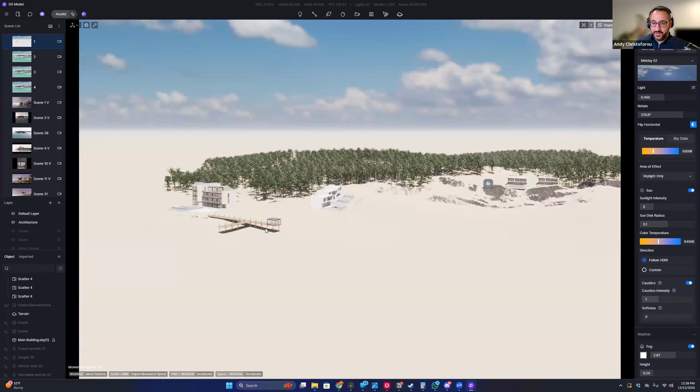This is basically everything I was showing you before, all the pretty stuff. At its core, any architectural scene comes down to your imports. I've got SketchUp and Rhino files that live in here, and you can transfer data directly through a direct import or through a live sync plugin.

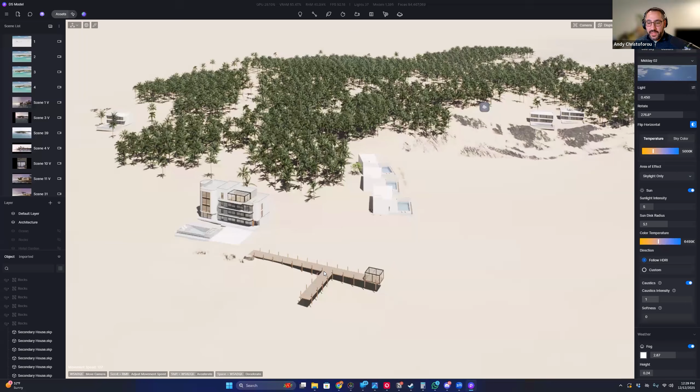The cool thing is, think of this as a warehouse—you're not locked to one file. That's one of the issues with Enscape; you basically need to bring everything into one mega file for it to have all that data. These are all different models, coming from different places. You can see this is one SketchUp model, this is another, and they're all different links. So it doesn't matter what software it came from, it can all live here.

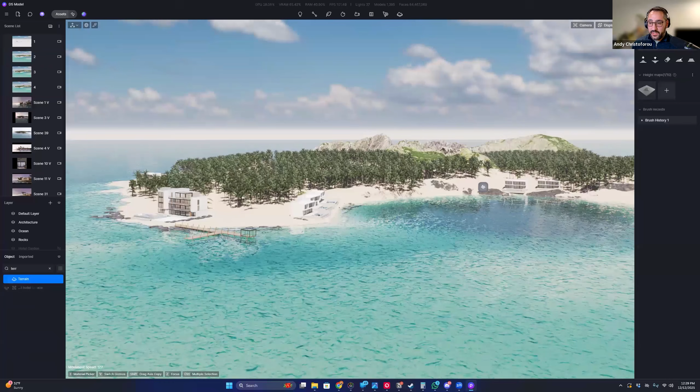So that's basically the architectural import side. Then, of course, we can start layering in more information, like environmental details—adding water and terrain. They have a full-blown terrain system, which is great for anyone working on sites that require this.

You can sculpt, you can paint, very similar to Lumion, so if you're used to that you'll feel right at home. You can even host vegetation directly on it—they're called brushes, but these are the different plants I have in here. I can easily add plants, reduce plants, brush more, brush less. All that is available here, and it's a really nice, very optimized feature.

One of the reasons I had to leave Lumion is anytime I had something that looked like this, it would flash a red poor performance symbol saying you're getting 2 frames per second because you dropped down like 20 trees. Here, because it's built on game engine tech, it's able to handle realistic lighting and vegetation in real time—the waves move, the trees sway in the wind, and you can keep painting till whenever you're satisfied.

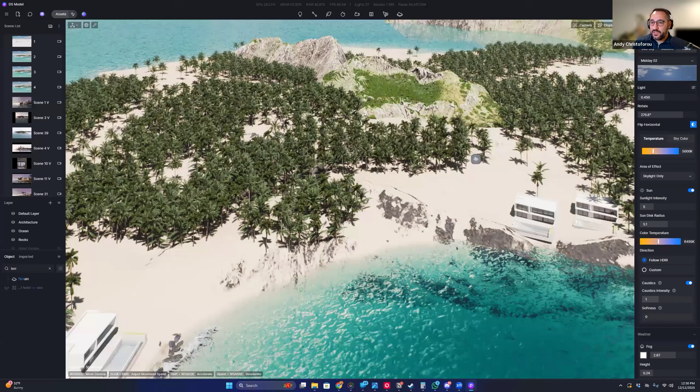And because of the terrain editor, you can bring in these awesome height maps and brushes—look at this, it's actually moving everything dynamically, all built into the terrain system. It's pretty crazy. So we've got that part. Then we've got the idea of adding more entourage.

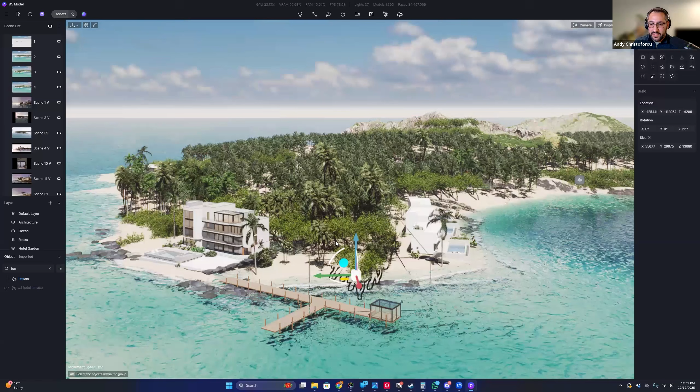This could be, people, it could be more trees and everything. You can see here that we're just placing things to fill in the scene. You can add in people, boats, and animated assets. That's something Enscape doesn't do well, where everything's static. Here, the boats will rock, the people will move and walk around a path, cars will move. There's a lot in here, which is really great.

And my favorite part, you may notice over here, is this thing called the scene list. This is basically the starting point of where AI can be really important. A scene list is not just a dummy camera position holder. You can see the boat moving here. It actually saves environment settings and visibility settings, meaning I can turn on and off layers and save them, and I can save environment settings to a scene.

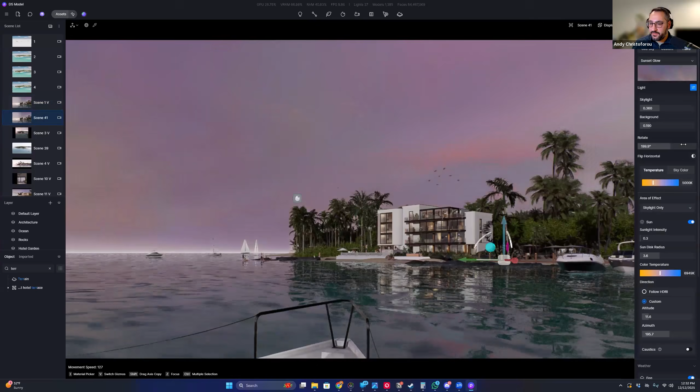So if I want, I'm just gonna make a new scene, and watch this. I can go over to environment settings and play with some settings. Let's pretend I make it really, really dark. If I save this, it'll save that and animate it. So now I can go between two different options. If I want to do a day-night test, I could do that. If I want to see what the project looks like with golden hour or nighttime, I could easily do these mock-ups and save them.

I can even put them in a group, which would let me organize my files a little bit nicer. But my favorite part, and this is where AI is really useful, and basically how I learned in architecture how people work, is they'll find a pretty picture and say, hey, can you make it look like this?

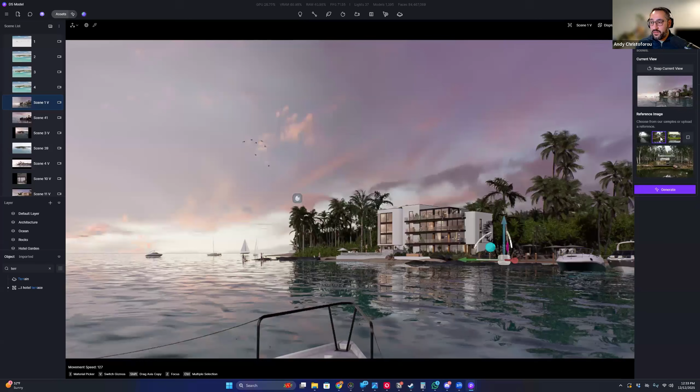So right over here, there's this thing called AI atmosphere match. This is where I hope you begin to see why I think D5 is incredible, because it understands the typical workflow. Like I was saying, people will say, make it look like this. So you can grab a reference photo from their library, or find one online. It could be literally any picture, from Pinterest or generated in Midjourney. It doesn't matter—you just grab it, put it in here, and it'll analyze that image and apply the same color correction settings as well as atmospherics. That's huge, because if you're a designer, you don't understand what all these settings do, like skylight, background, rotation, HDRI, sun intensity, and radius. Nobody really gets that.

Joshua was saying, you guys can see my screen, right? Okay, okay, all right, good. You scared me for a second—I was like, has nobody been seeing my screen? Okay, great, all right, awesome.

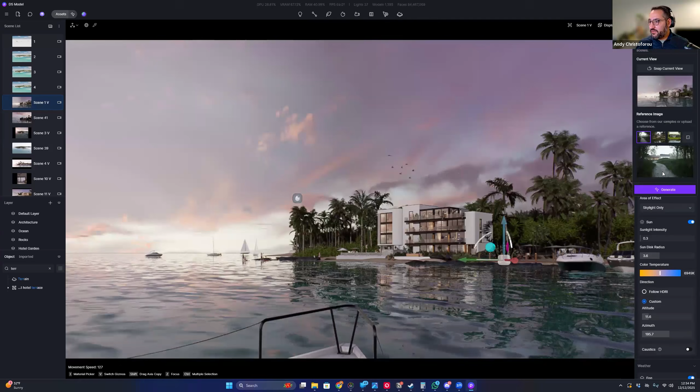So let's go back here. If I want, I can grab an image of my own, or just grab a default image. This one looks kind of cloudy, as you can see. I'm gonna hit generate, and watch what's gonna happen. It's gonna start generating a skybox from this image, as well as bring in some of the fog. See how it's working? It goes in steps, adding more and more detail until it's about right.

This is great because since we're humans and designers, it's easier for us to just find something we like and tell D5, hey, can you match this so I don't have to do it manually? There we go—it picked up some of the coloring and the fog in the background, and I can play with the strength of it if I want it to be more intense or less intense.

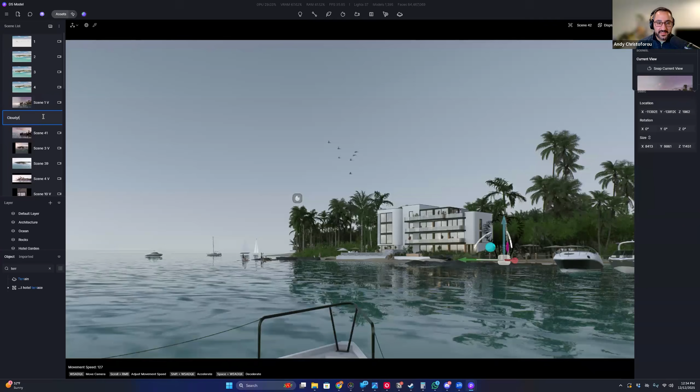So this thing is huge. AI Atmosphere is great—I usually just keep making duplicate versions of my scene and test it out. So now I can hit add scene and call this the cloudy scene. But let's say I don't want to use this function.

They actually have this great thing called D5 Studio. For anyone who works at a large firm, or anyone that's more than two people, there's this idea of a team space where you can save all your presets. So your environment settings—you could say, hey, this is the firm standard for a sunny day or a cloudy day, and save that here. You can save your models and materials to your library, which gets shared with anyone in a team space. That's really nice.

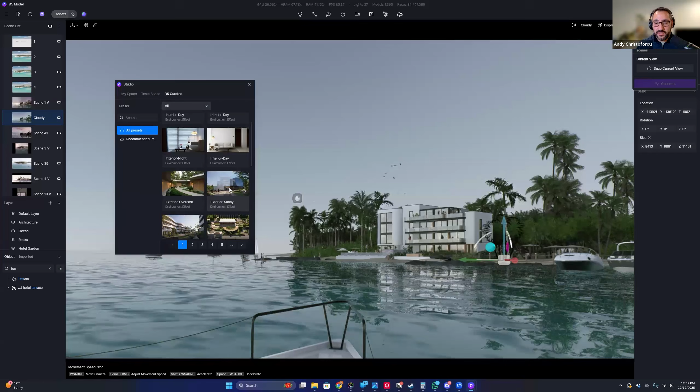So what I could do is just double click this and it will apply that to the scene. This is huge because if you don't know what you're doing, you can just go here and find something that looks really nice. If it resonates with you, you can go in and apply it.

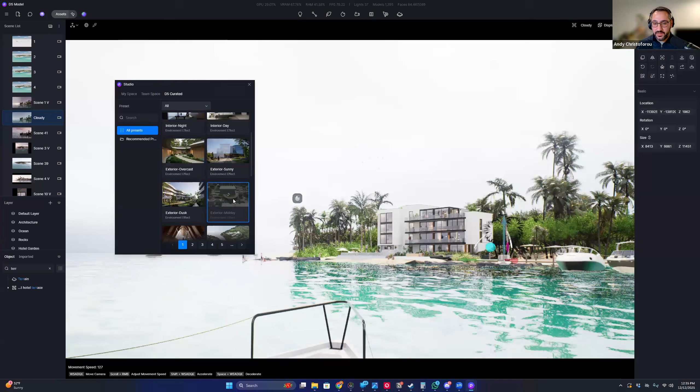So they've taken care of the traditional preset workflow as well as the AI front. There's a lot of great options in here. I always recommend just going through it—it's pages and pages of content—and see what makes the most sense. This looks great, I actually really like this one. I'm going to save this one. We'll call this midday.

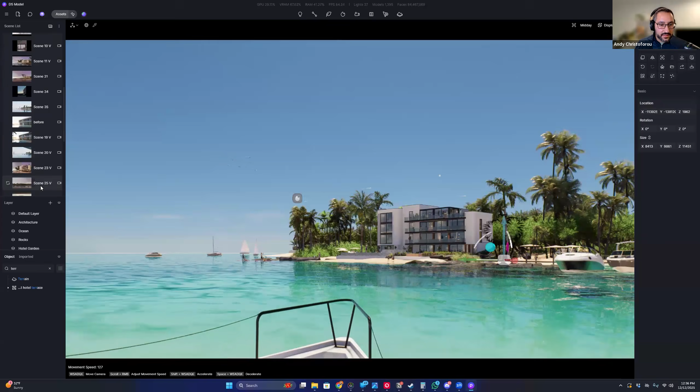So that's one side of it. Now let's talk a little bit about materials because this is another huge one. This is a massive project we've been working on. Say I go over here—all right, so I've got this really cool view, but I also have these houses that got this super plain material.

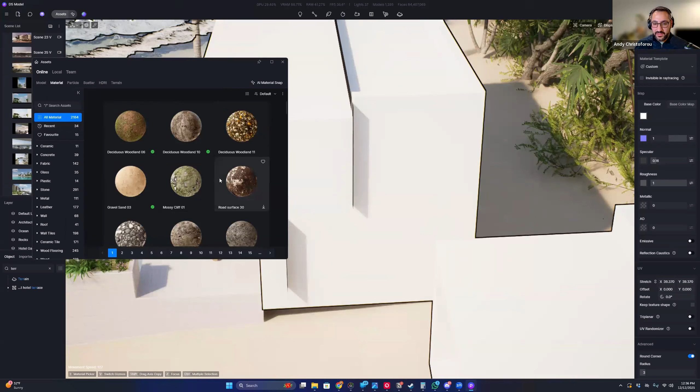So in D5, there's a couple ways you could get materials here. You could use their awesome, amazing material library where there's literally like 2,000 materials. Any type of thing you need is here. The reality is 90% of my materials come from here. It's very rare that I have to find something so unique that I can't find a good starting point in the library.

And then Ben's asking, can you discuss variation? Oh yeah, we could definitely discuss that, that's a great point. So let's say there's something I actually can't grab an image of, or a material I don't know—there's two ways of doing this.

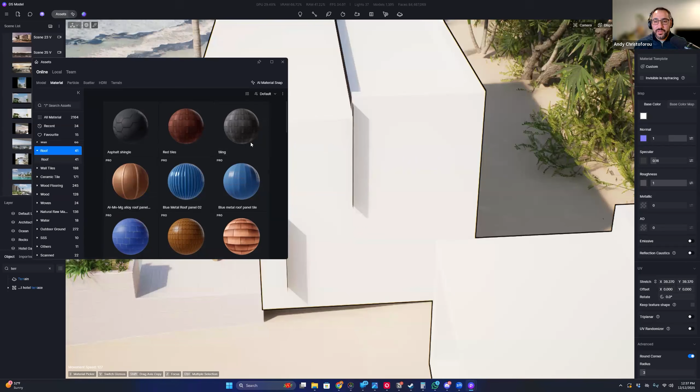You could use this thing called AI Material Snap, and this will look at a photo. You can upload a photo if you want and select the material you want. So let's say I want this wood—I can add to my selection, and then tell it to generate a material based off of that.

Again, this is how architects work—we find a picture, or the homeowner or client says 'hey, I like this style, can you just do this?' You're going to hear that a lot. This uses AI in a healthy way because doing this manually sucks. You have to find something that looks similar or do a bunch of photoshopping, and that art of photoshopping images into textures is so niche now that not a lot of people even know how to do that. So this is going to think for a little bit and apply it.

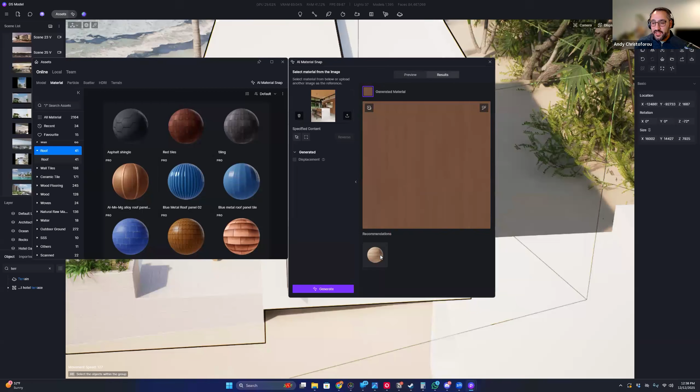While this loads—here we go. This is the AI generated version, and it also gives you a recommendation from the asset library itself, which is great. All of these are seamless materials, so I could just apply it to my project. It's as simple as that.

The cool thing about the material editor in general is—one thing I always found really annoying in something like Enscape is the way things get mapped. So if you ever have issues mapping or getting something seamless or realistic, there's a bunch of settings here. Triplanar basically takes all the faces, despite their scale or individual UV, and evens it out, giving a nice world scale.

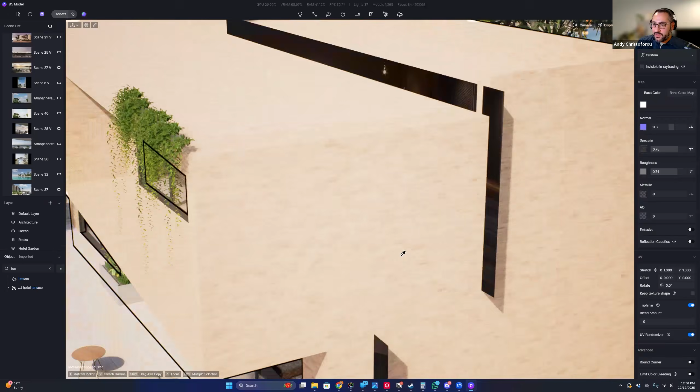Then there's this idea of a UV randomizer. This isn't great for linear elements, but if you have anything that's tiling, this will break it up and make it randomized. Then we've got this lovely round corner feature, which bevels all our edges so you don't need to model that. Again, they're doing all these things that are super useful on the workflow front.

Then they have this other tool called AI generated texture maps. So if you upload a texture of a material—let me see if I have anything, probably not off my hard drive—but you can actually upscale it and make it seamless, and then generate all these maps all with this button. So its job is literally to generate texture maps.

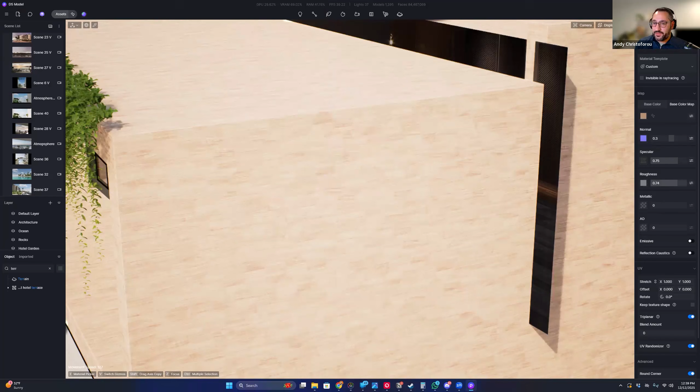Since I'm using something from their library, that's not going to work here, but the idea is you could grab something online and plug that in, and then you'd get normal and roughness maps. Again, you don't have to make these maps, because nobody likes making them unless you're an ArchViz artist. So that's huge.

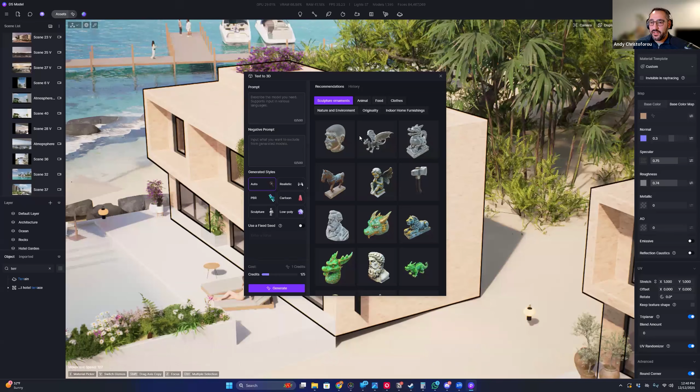So they've got this material snap, they've got AI atmosphere, and that's not even all the settings. They've got this guy right here, which is text to 3D. So if you want a chair or a piece of decor, as they're showing here, it will go from prompt to 3D. It's just crazy. Let's say I want this little dragon thing, I could go and generate that. I could generate these pieces of sculpture, some rocks. It's just amazing, and that's all from text. Very, very clever there.

Now, to answer Ben's question, because in the world of architecture we deal with a lot of options, something I know they're working on is a proper variation manager, but the best trick we found is you can actually just create a layer. So let's say I'm going to add a layer, we can call this option one. And then we can call this option two.

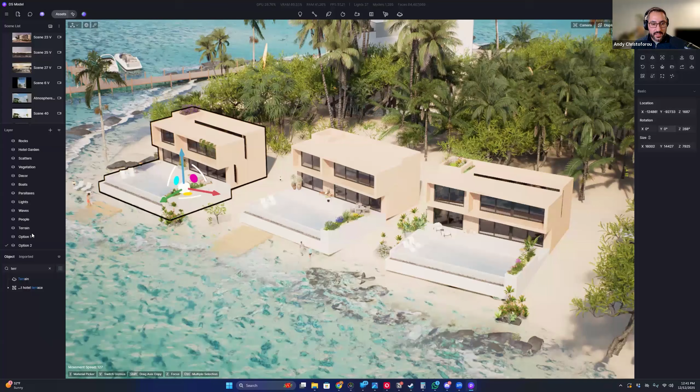And you can actually just plop things on. So let's say I've got this, let's just say it's a design layout, I'll put this on option two. And I can turn this off. And then this is like the layer for option one, or like the view.

So you can actually save this to your scenes as well. So now that I have this here, I can create a new scene and we'll call this option one. And if I sync that, then create another one called option two, and just do the vice versa, turn this off, turn that on, and then sync it, I can easily switch between the two. And you can do this for materials, for layouts like this, different geometry. Very, very simple way to do that.

We're working on a way to package that all up so it's a little bit easier, similar to the Lumion option editor. That one's really nice. So you've got that.

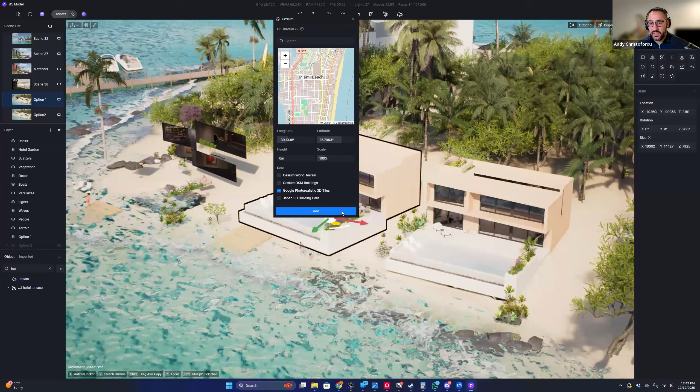Then the big difference I'd say I've seen with D5 and some of the other tools is the addition of some really nice features called Cesium. So typically, when you need context, you need to go out and find a 3D model. Well, now they basically have this plugin called Cesium that brings in Google 3D tiles. So if you see something 3D in Google Maps, you can hit add, and it will import that for you.

Check this out, I think I'll start from scratch just so you can see that. I'm going to hit add. Let's say my site's right here, and now it's going to stream in the world. So now looks like it's loading. Come on, Cesium. Oh, put this on default layer. Great, and now I've got my Google Maps.

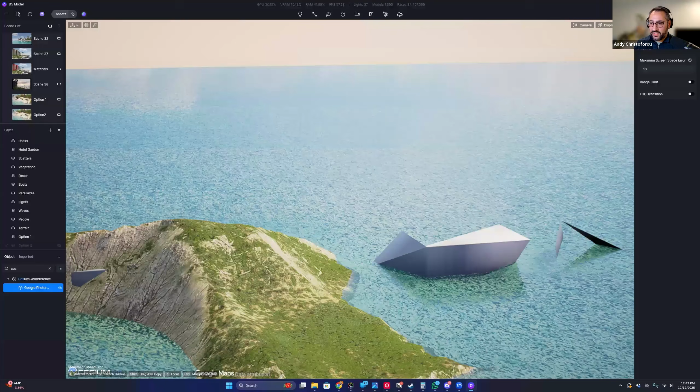And now I just got to find it, it might be under the water. Here we go, perfect, so it's literally loading in the world. Let me turn this off and raise this. This is great because as architects, you know how annoying it is to get 3D data of your context. So let me fly over here. This is streaming in the whole world, and I know it looks super...

Yeah, so Jay, the Cesium feature is actually coming to individual plans in the next big D5 release. Right now we're on 2.11. The next one, I'm not gonna spoil it, is coming. I can't give any specific dates, but it's coming and it will be for individual plans.

So right now it's streaming everything in because I was flying around, things are loading in, but you're getting the textured Google Maps cities, which is great because we're kind of all sick of the OpenStreetMap-style boxes, which you could also do here. This is going to give you the textured version. So this is huge, because now when you need aerials and backplates, you could just load this in, drop your project in, and now you have this.

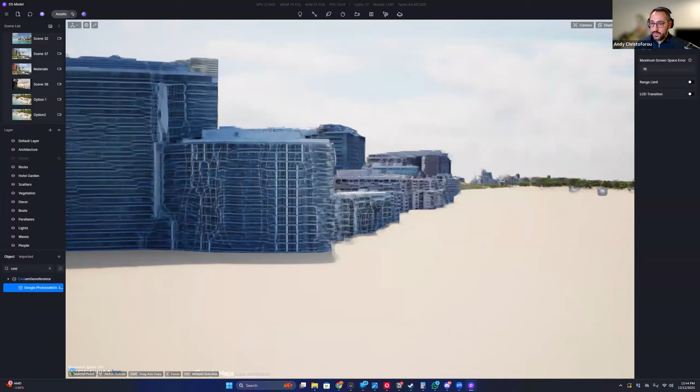So let me see if I could turn this off so you could see everything. Ocean. And now let me bring this up. I gotta find my gizmo somewhere. But look at this, it goes on and on and on. And then just for the sake of performance and everything, it's not loading everything, it's just loading the details that are in camera. So I've got all this terrain. Trying to find my gizmo.

There we go. Location, let's say. There we go. Perfect. This is what I want to show you guys.

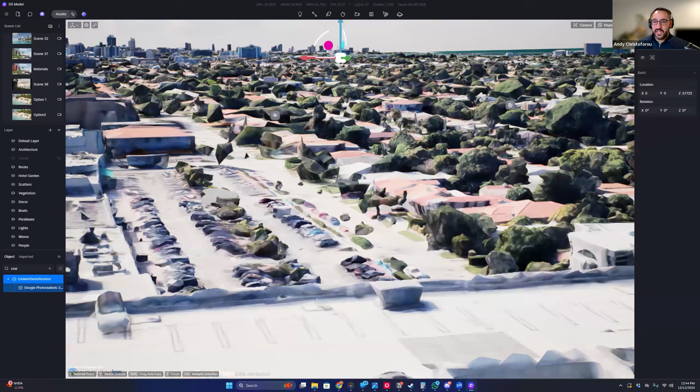So it brought in water, it brought in the mini cities, the mini houses, big houses, skyscrapers. This is basically all of Miami, right? So very, very useful because from far away, you can render this out and then use their upscaler, which is what I'm going to get to, to make it look nicer. But you can see these are all the typical things architects deal with that they've figured out. And that's what I love about all this.

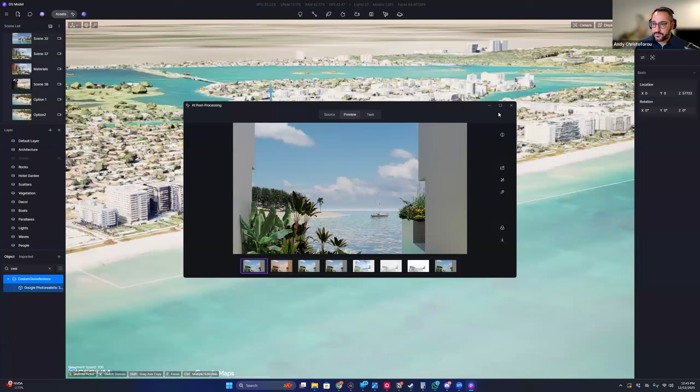So now I'm going to talk about the AI post-processor, and then we'll wrap this up. Check this out, I had this rendering, let me maximize this. This is the rendering. I picked a very low HDRI just to illustrate this point, but you can use their built-in enhancer and style transfer functionality to improve it.

In one click, I was able to go from that scene to something like this, and look, it made the clouds look beautiful and fluffy. I mean, look at the vegetation, look at the boat, right? And you can control how much it affects the image or not. Then here's another view, again look at the difference in the quality of the clouds. So clouds get enhanced, vegetation gets enhanced. Pretty much it's like a free enhancement.

In my opinion, because the argument comes up, oh, should I be using D5 versus V-Ray or Corona, it really comes down to your expertise and time. But I think if D5 can get you like 80% of the way there, and then you use these enhancers that aren't really changing much about the overall design, you're getting an extra 10, 15% boost in quality. Look at this before and after. So with a really rough image, you could do that.

And yeah, it will enhance characters. You can even specify what particular things you enhance. Check this out, in painting you've got smart retouch where it touches everything. It's got better sky, better water, vegetation, and characters. So if you render a person, you can choose to enhance it as well, and it'll basically go from the plasticky 3D look to realistic.

So that's the photorealistic side, but then there's the actual sketchy side. And I actually love these styles and everything. All you're doing is choosing from these different style settings right here, whether you want a marker drawing or pencil sketch or watercolor, or if you want winter, autumn, you name it. So then you've got pen and everything.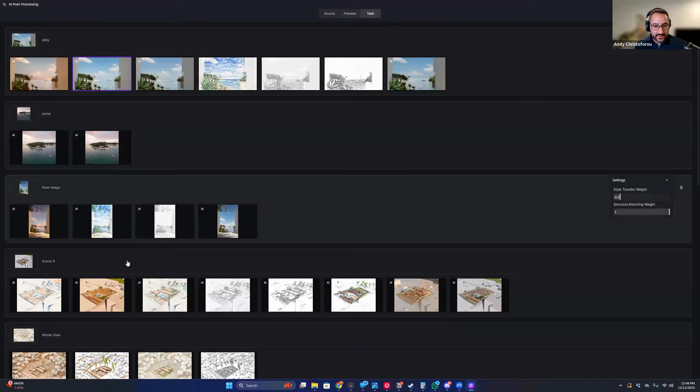I'll give you some other examples. This was... yeah, here we go. This is a good example of a kitchen, right? So I could easily switch it to stylize, and it does a good job preserving, if you look right here, the actual structure. And it's the same thing for the realistic side.

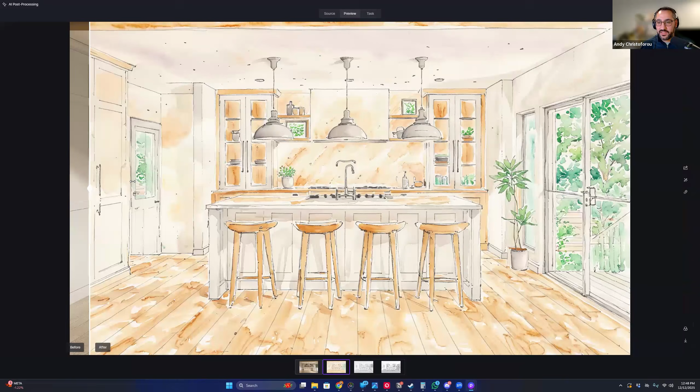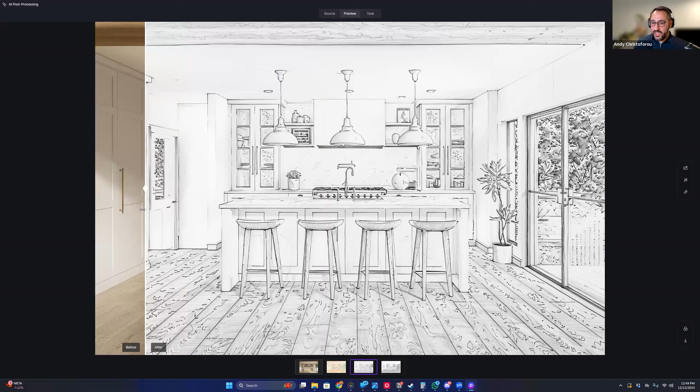But we love this kind of stuff because think about it, you're working with a client, it's like your first design meeting. You can't go into a meeting with all this figured out because design is all about iterations, right? So it's nice to have these kind of concept images early on, so you could just talk about the form. You don't even need to talk about texture, you could remove that from the equation, and you don't need to spend 10 hours drawing something like this. So there's a lot it could do.

I'm trying to find another one. Yeah, here's a good example. This is just for you, Michelle, about the structure.

If I were to show you a transfer here, you can see the building—in this case I didn't even touch it. I just said give me the pretty flowers. Then if I want to do something more intense, let me double check this one. Yeah, this is just for the sky. So like you can tell it to target elements outside of the architecture, or actually target the architecture itself.

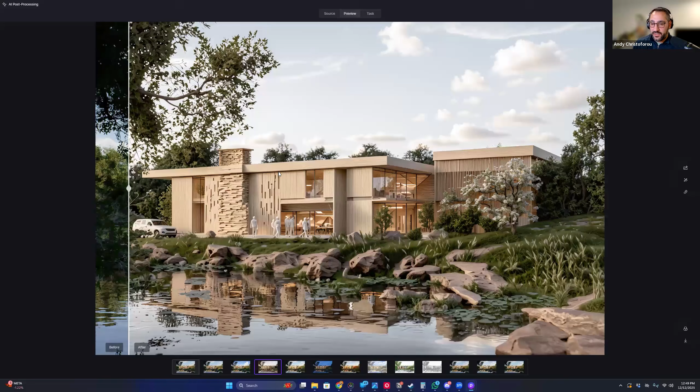This one was to convert it to a scale-looking model. This was just to improve it overall. But you can see it does a good job with the forms and everything. I had the texture weight really low because I wanted to enhance it, but you can see the people begin to look better—they don't look as plasticky.

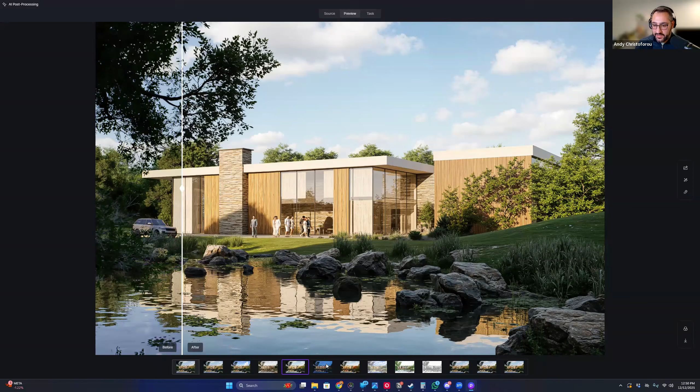You could even go to different shifts if you want to do a nighttime rendering. And then of course you've got your stylized and your enhanced images as well. So this is what I mean—the car, for example, looks much better, the people look much better. But this is all because I'm telling it what I want to focus on. So they give you the flexibility.

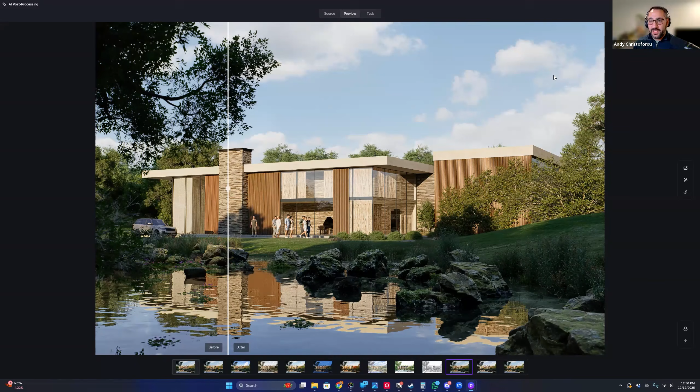And that's the really nice thing about D5 and the AI functionality—they figure out the things that matter to architects the most. And that's the choice you have to make with AI tools. They've got a bunch of other amazing functionality, and I should probably just keep doing these webinars to talk about D5 functions, but nobody else is tackling the AI stuff on the same level as this.

I didn't even talk about the AI agent—this is if you're working with landscape designers and you want to create a scatter preset, basically, hey, just fill this whole area with these trees and vegetation. You could choose a preset or just tell it what you want. Like this example before when I said I'm working in Dubai, I need drought resistant plants—it'll do that. So yeah, there's a lot here.

I could talk about—we should make these webinars 4 hours long and I could just talk about all the features. But Peter asks, do you use other platforms for rendering or exclusively now? So basically, if we're talking traditional ArchViz, 100% D5.

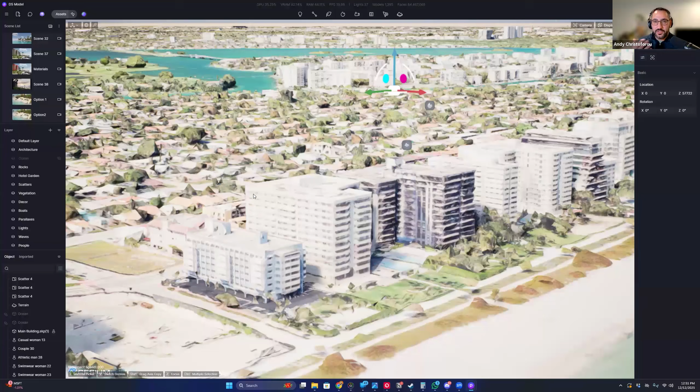Personally, I've had an interesting story. I started out in the world of ArchViz with Unreal Engine—Unreal Engine, incredible piece of software. I highly recommend it if you want to do interactive tours, because I was doing VR for a while, and that's an incredible platform. So then I realized I can't really make a business off of Unreal Engine because it's too slow to do all the stuff we need.

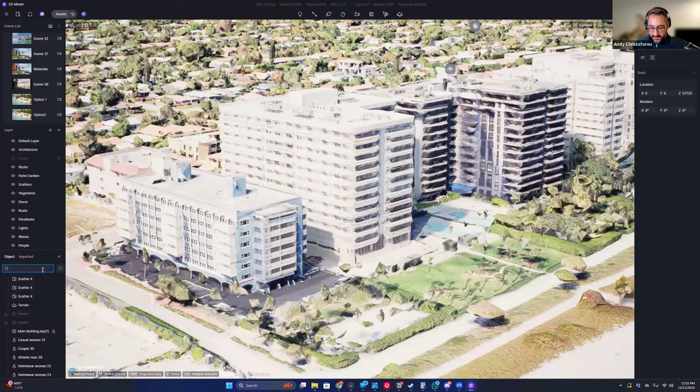And then I got into Lumion—this was around 2015, 2016, used Lumion for a bunch of years, and it was good, great speed-wise. But then I felt ever since 2019, 2020 it was falling behind. I wasn't a big fan of the updates. And then I played with Twinmotion for a little bit, which I thought was cool. And then D5 comes along and it's just like, wow, this is better than everything.

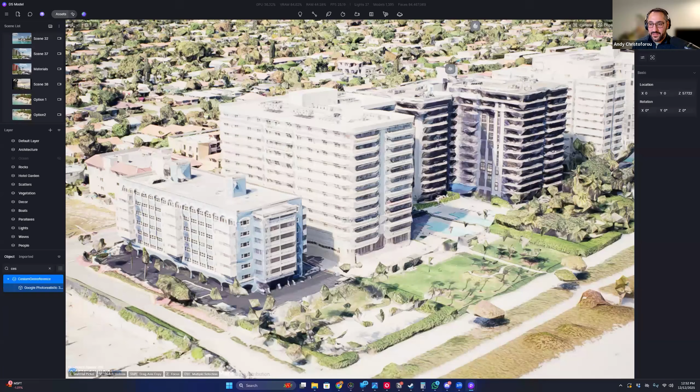And my firm KPF, we used to be 100% Enscape, and now we're transitioning out to D5 because it basically does everything that Enscape does, but at such a higher level. There's some functionality I didn't even talk about—if you're familiar with Revit and multiple people working at the same time with work sets and work sessions, you can do the same thing. You can break up your scope of the model and say one person gets this file, another person gets another file, and you can sync to central. Nobody else does that. We have a lot of people on our teams and it's great—everyone can contribute to the same model. So that's huge.

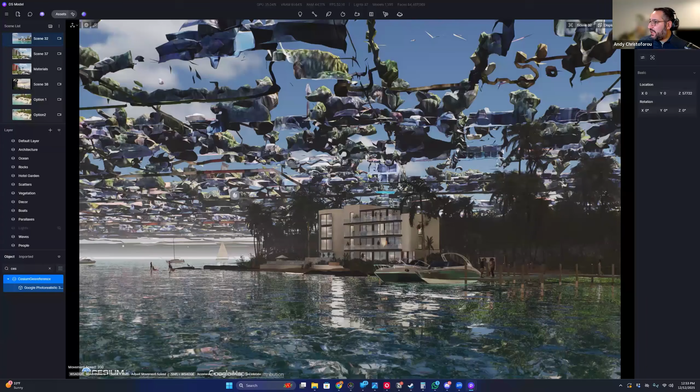And then—sorry, I'm catching up on the chat. I tried to enhance a D5 scene with AI and it took a long time. The long time, this is all server related—could have just been a busy day. I'd recommend just trying it again to see what's up there. But it's generally very, very quick.

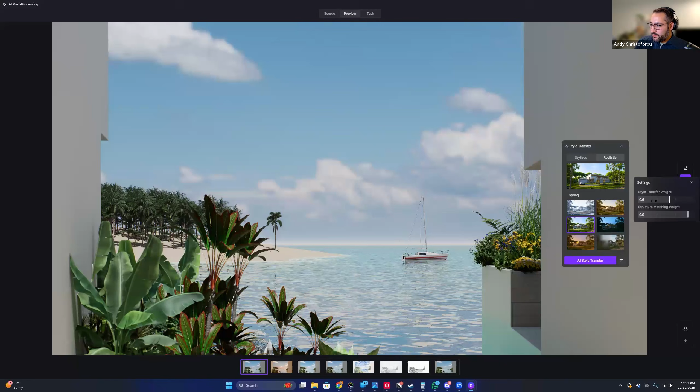Like if I were to grab any of these scenes and watch—because I'm doing this live, obviously it's not going to work. But if I grab any of these settings, just to put my money where my mouth is, let's go with spring, and I hit AI style transfer, and I do something like this.

Generally it's probably less than a minute.

So while that's waiting, did I try VR in D5? VR in D5 is actually the most insane VR experience ever. Fidelity wise, it's like ray traced in real time VR. It's insane, you need crazy hardware, but it's amazing. In terms of laptops and everything, the better, if you have the budget for a 5090 laptop, Jesus, yeah, go for it. Right now I'm using a pretty crazy graphics card, and you save so much time and money when you have the right hardware.

Wes is asking, are there any AI starting to do construction drawings? That's one of my biggest issues with AI right now, is that it's tackling all the creative things. Think about it, AI is getting rid of creative writing, illustration, photography, and it's not going for the boring stuff like CDs. I think the reason, and I think I'm allowed to say this, is that when it comes to training sets on CDs, all that stuff is really confidential and proprietary. So someone like Autodesk doesn't have billions of drawings to be trained on, if that makes sense. I think that's actually the limitation, they just don't have the data set for that.

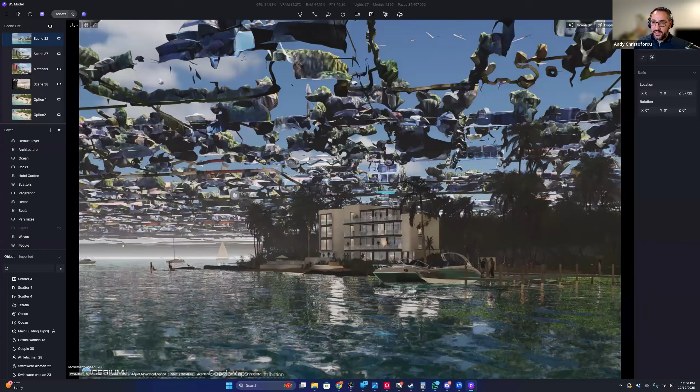Scott's question about the VR stuff, where is it? I think I actually have to enable it, but it's a button, VR beta. So when I click that, I don't have the headset on or connected, but you basically click that and go right into it. The only difference is you don't have an executable, so you can't share it or send it, you have to open up D5 and run it. That's one of the only things there.

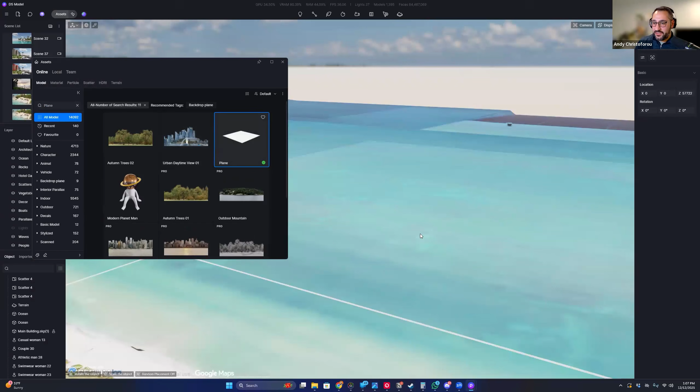I'll show you two features of the scatter. I'm gonna grab a simple plane—you can do this on terrain, but I'm just doing this plane for the sake of it sticking out easily. So if I have a plane here, let me scale this up and move this up.

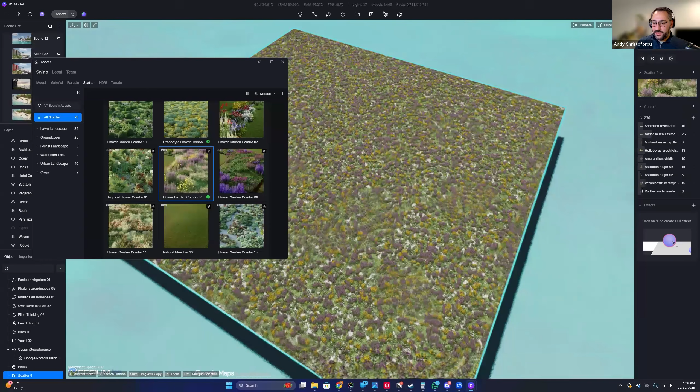So look at how dense this is. It just added, what, 6 billion faces, and I'm still getting 30 frames per second. Look, I can literally go down into here and it'll take a second to load, but it's crazy.

So this is the typical scatter. If you want to use the assets, all this is editable. Let me look for scatter over here - I think it's this guy. You see these are the parameters, like the probability of them spawning, how big they should be, and all that. So you could do that, or you can go over here to the AI agent, this guy.

Let's just say I click this. I can swap out these details, but I'm just going to use the default for the sake of time. So it's going to look at this, analyze it, and create a scatter group.

So basically what I just showed you, you can place on a plane, and then you can even export it out to Excel, which is great because we give this to our landscape designer or architect, and they could verify the species, since you used the species names, and say this looks good - let's order 500 of this, 300 of that, whatever.

That's all there. So there you go, look at this - this is the schedule. Imagine doing this manually. It fulfills the water requirement, and then it fulfills the light requirement and everything.

So once this looks good, I can hit auto scatter. It takes all those species, and then I can left click and create. So this is like 20, 30 species. It's going to put all that in a scatter group on this plane, and then I can choose to export it. It's insane.

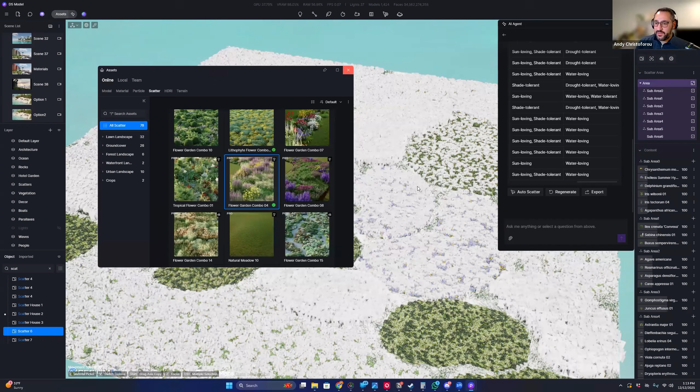When you talk about US money, or the US dollar elsewhere, it just does not translate well. Even when we talk about doing business outside of the States, it's really difficult to make sense of. But they understand the user base. The reality is the majority of ArchViz artists come from third world countries, that's just the reality of it, that's where the data is. There's no way someone's going to spend 80, 100, 200 dollars a month on a subscription.

But you can see the auto scatters coming in.

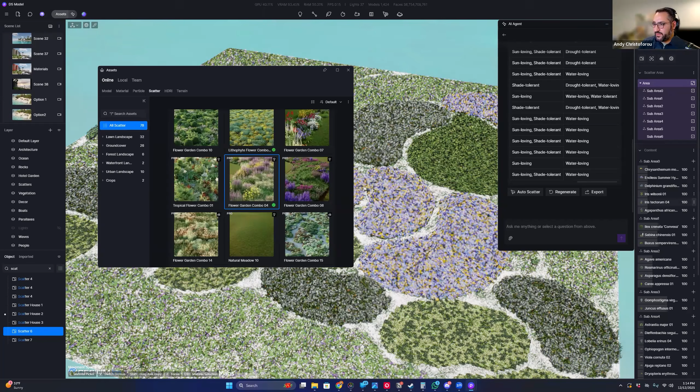Ralph, I think there's still good starting points with the parameters of what the plant is. At least if somebody can figure out the prompt for location, sun requirements and water requirements, that already puts them in a much better spot. But if landscape architects want to generate all that, that's totally fine. I'm just saying as an architect who doesn't know about all these species, this is a good middle ground so I could be at least somewhat intelligent. And if the species is wrong, I'd say hey, I like the look of this, can you recommend something? We don't want to get rid of their jobs completely, it just helps inform the design conversation.

So the wish is to get sharp, transparent backgrounds around the imagery, or insert a background photo for some jobs. That may not be possible in D5 due to needing real sharp, transparent backgrounds around the imagery.

There are things like you can import your own HDR, your own HDRIs, and you can also do your own backdrops. They do have starting assets for backdrops and everything, so you can swap this out with your own version, and then go and upscale it, and it's going to be pretty close to what you're talking about.

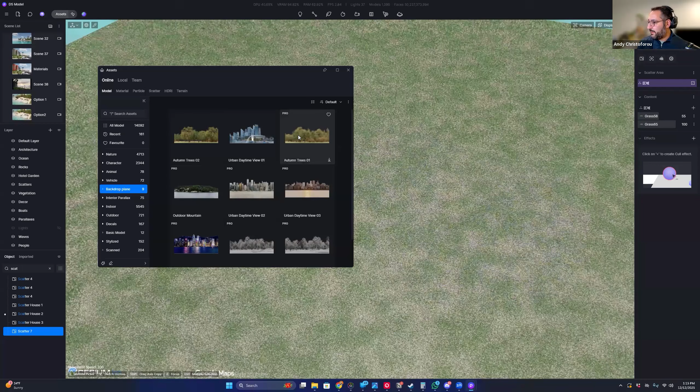Ralph, if you've got very good comments about how they should handle it, reach out, you could send it to me, I'll forward it to them. That's the beauty of working with this team. I'll give you a great example: these assets, go to model and then character. These came from my firm saying, hey, we need more people for hospitality, and within 2 weeks we had 200 assets. They are so good about that stuff. So if you can put that in a nice structured paragraph of what the plan should do, they want this feedback, they're really eager, they get this stuff. So definitely shoot that over to me or support.

We wish they would put non-scientific names in there. I totally agree, it would be nice if there was a nickname slot. What I tend to do, a little tip, is favorite the ones I like, and then you can go and filter by favorite, because I don't know what a Punica granatum is.

Thomas, I really like Cesium for exterior renderings, but you can't place anything. That's a good one. For us, we deal with a lot of urban projects, so if we had that kind of terrain, you can import a height map. I don't know if that helps you or if you even have one, but you can import it, I think it's under manage. I don't know if that'll give you precision, but you're right.

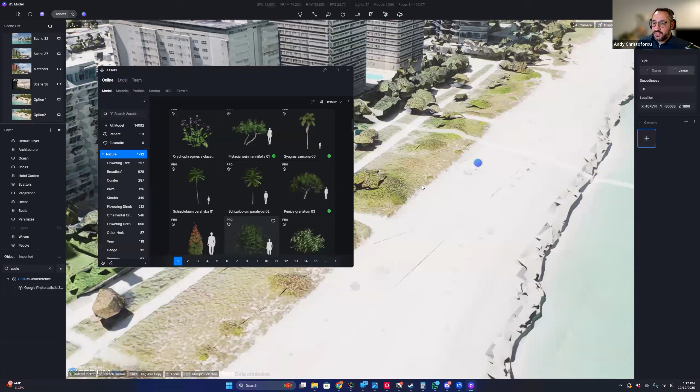The Cesium geometry or link, whatever you want to call it, is not technically D5 geometry. So you're going to have that limitation of it not accepting everything, but you can still path on it, you can still grab your path and put stuff on it. It's just scatter, you're right, it's not going to pick it up because it doesn't distinguish different material layers.

And Franklin Cesium is coming into the new version of D5, which is, I'll just say, in the near future. Not like I'll give a deadline, but it's coming.

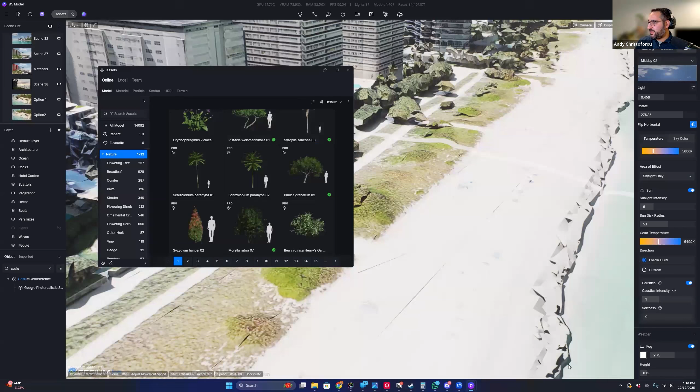Oh Jeremy, that's a good one, filtering by the silhouette or the shape. Yeah, to add to that, I would like it if I could choose small or medium as well, like this scale guy. I like your idea with the silhouette, that's a good point.

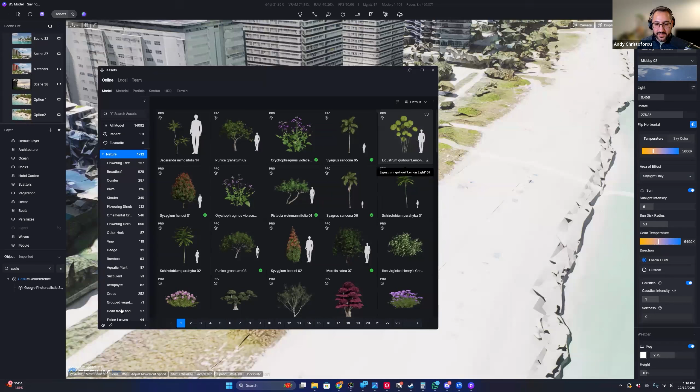Any news for custom interior? Ooh, this is one we've actually requested. This should be coming in the future, just because I understand the nature of how it was set up, like their parallax. This can come, I'm not worried about this.

We bring this up all the time, but these parallaxes, for any architects out there that don't know what this is, are great when you've got a shell of a building and you don't have the time to fill it with interiors. This fakes interiors. This is another thing D5 was first on. You see how it's a plane, but when I move my camera, it mimics depth, so it looks like I've got a full-fledged interior there, but it's not. It's all a simple plane, and that's very cheap in terms of being performant.

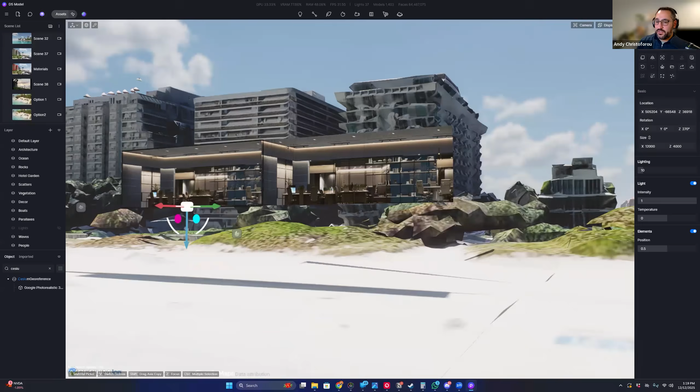Support for CAD, I mean it depends, are we talking 2D? You can import FBX, D5A, SketchUp, 3DM, ABC, OBJ. So what could you get CAD out of? You could probably go into FBX maybe, or OBJ.

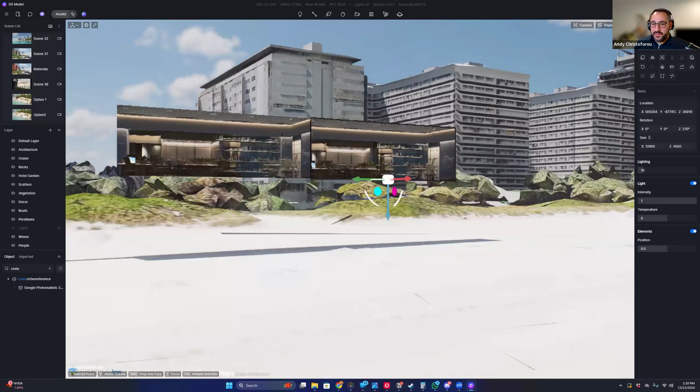Yeah, but the custom parallax would be nice because we've got very specific interiors and then we could make our own, that would be pretty cool. Look at that, it's amazing. And then you could change the light intensity as well, the temperature, if it's residential or commercial, cool or warm.

No, they don't, Jay, they don't have direct support. It's not like a dedicated plugin like the SketchUp one or the Rhino one. If you ever have questions on those though, check this out: D5 render plugins.

Oh actually, no, I lied, you can go right here, this is easier. So right under workflow, this guy sync, these are the ones that are 100% supported really well that have the live sync component, meaning if I model something in one program, I see it immediately in D5, or if I orbit around, I see it there.

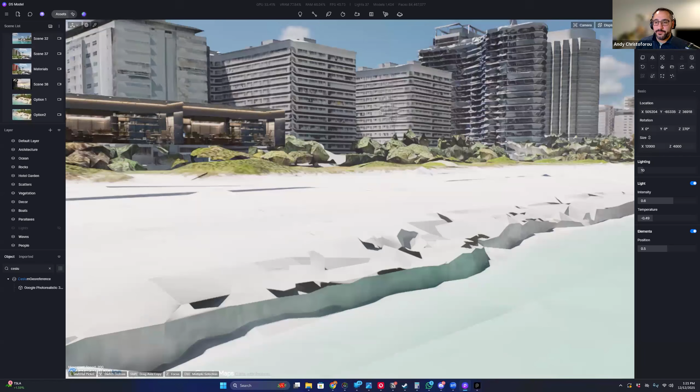Yeah, so that's what that is. Yep, Blender is here. So here's a good example of the sync, we've got that, and you can see it's got the live sync. So you move Blender around, it moves D5 around. You model something in Blender, it appears in D5.

Blender is cool, but no direct AutoCAD. Jay, are you doing 3D in CAD, or are you just talking about bringing in the 2D plans? But I guess why would you bring the 2D plans in? I'm curious there, you do 3D in CAD? So I would try exporting out as OBJ, or if you're familiar with SketchUp, importing it there, modifying it further, and then using the SketchUp plugin. But yeah, no direct link to CAD.

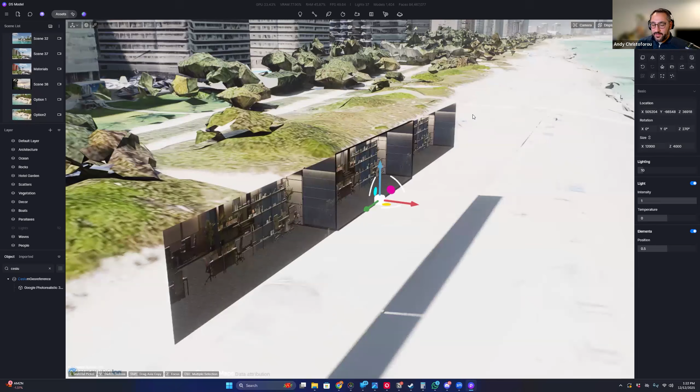Yeah, we'll definitely do more of these what is D5 webinars because I think it's good. I think it's important to get the word out because the current players are good, but they're not amazing, and it's frustrating that D5 has to be the underdog that comes out of nowhere and is innovating on all these AI fronts, which I feel like you would always look towards the bigger companies like Autodesk or Adobe, these big guys with billions of dollars leading the way with the new frontier. But it's never the case, and it's good to have a disruptor, I think.